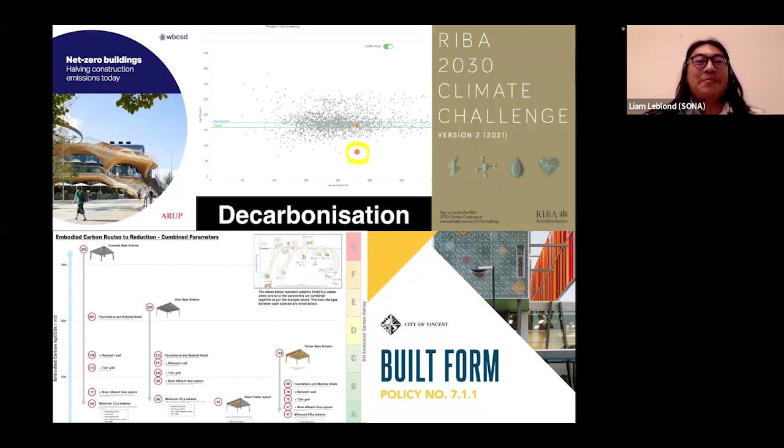Thanks, Liam, and thanks for joining everyone. It's always a wonderful thing to be hanging out with young folks.

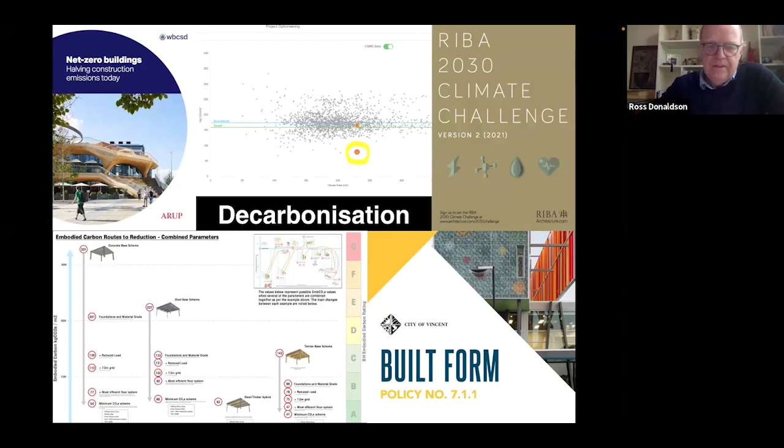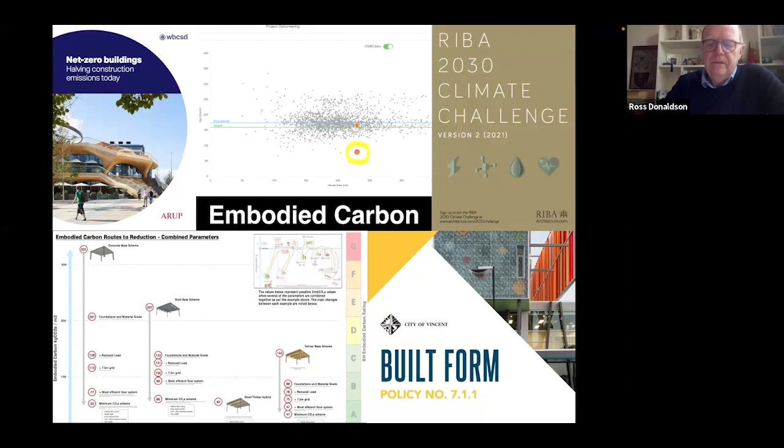So I'm talking about decarbonisation today, not surprisingly, with a specific focus on embodied carbon. The central theme around embodied carbon is really about dematerialisation, kind of less stuff. There's huge gains to be had by rationalisation, whether it's structure or other aspects of a project, to make massive gains in embodied carbon. And it's probably a bit easier than everybody thinks, certainly easier than the general discourse seems to be about it.

I'm going to do that by talking about 5 separate sources of inspiration or information. There's work that the Royal Institute of British Architects have done with their climate challenge document produced in 2021. There's a very interesting case study of the City of Vincent here in Western Australia, and their work around requiring life cycle assessment. Then I'm going to go on to Carbon Trace, and these two are basically focusing on the residential sector. Carbon Trace is an amazing platform that Tom Petty in Victoria has put together, and I'll elaborate on that when I get there.

And finishing up with two of the world's leading engineering firms, Arup and Buro Happold, focusing primarily on the carbon in structure. And in the background context, of course, it's impossible to know what everybody knows. You don't know what you don't know in this context.

Just as a brief scene setting, the general move in terms of measuring carbon in buildings is based on a European standard, EN 15978. This diagram is a very simple representation of the different phases in the life cycle of a building, and these are the phases that are used for measuring carbon.

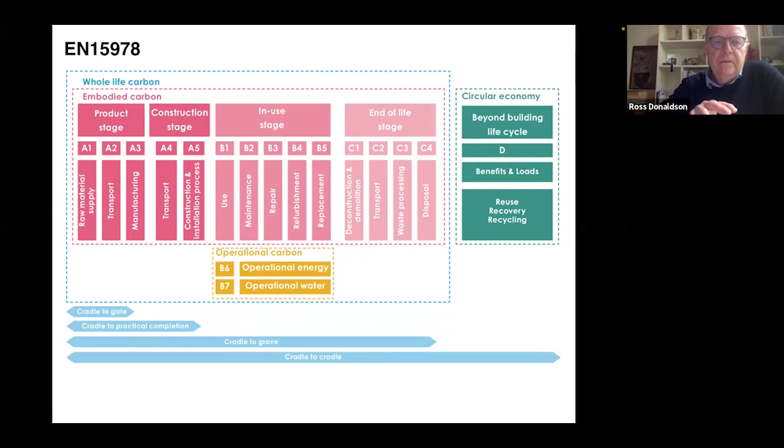Then there's the in-use stage of the project, which I won't talk much about, but some of the measurements do include this, and the end-of-life stage, which is recycling, hopefully, and demolition, but hopefully not disposal to waste. There's a circular economy element to it, and whilst the RIBA refer to the circular economy, I really won't be today. So just today focusing on embodied carbon, upfront carbon during the product stage and construction stages A1 to A5.

So the first document is the RIBA's climate challenge from 2021, and it's an interesting document to look at in terms of the scene setting that they include in a couple of diagrams, tables from their document, which talks about operational energy at the top and business as usual, which is what they were saying was the British sort of average project, business as usual projects, this is the commercial sector.

They were setting targets for 2025, reducing the energy consumption in the building, and by 2030, more than halving the energy consumption in the building. That's based on using kilowatt hours instead of CO2 here, because of the rapid rate of the greening of the British grid, and not wanting to get caught up in the fact that the electricity supply will be fairly green fairly quickly.

They want to keep the focus on reducing the energy consumed, and embodied carbon, 1,400 kilos. Don't worry about the numbers too much, but it just shows the British have fairly advanced thinking in terms of driving carbon down. They have a table for other classifications of buildings, including new schools and residential. There's some correlation between these numbers and others I'll be showing, but I don't want today to be too focused on specific numbers. It's all about how you drive the carbon down and the percentage gains you can make.

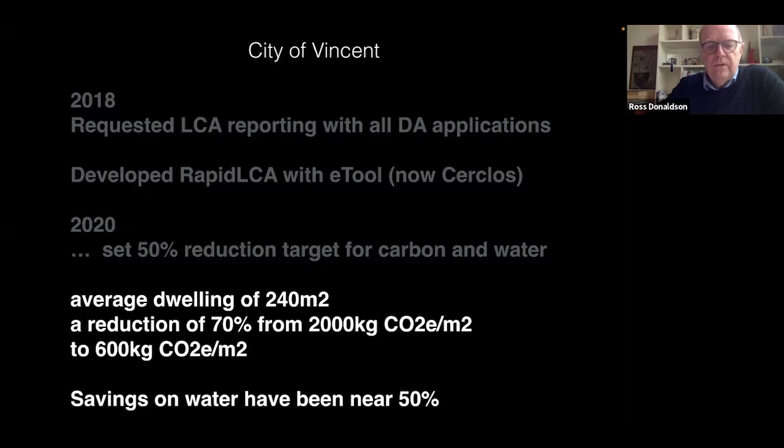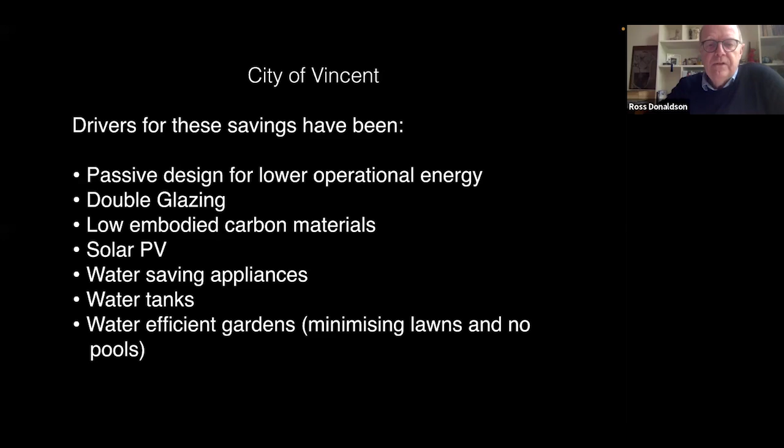The fascinating thing is that by requiring people to measure and report, it straight away changed the culture of design. Designers were then focusing on trying to reduce the carbon, and the outcome of this simple shift is that now they are achieving something like a 70% reduction in whole of life carbon. From 2,000 kilograms per square meter for a residential building, they're now down to 600 kilograms per square. It's amazing progress just from requiring reporting, and they've had major gains in water consumption too. These outcomes have been achieved through passive design, lowering operational energy, double glazing, low embodied carbon materials, incorporating photovoltaics, water saving appliances, water tanks to capture water, water efficient gardens, and no swimming pools. Some quite simple steps that are really in everybody's remit.

Alongside that, there's a fantastic piece of work done by Tom Petty, his platform called Carbon Trace. He's taken the NatHERS database that CSIRO carries for all residential developments in the last 10 years - a database of 10 million. He knows the embodied carbon of every house in Australia built in the last 10 years. It's quite remarkable. This diagram isn't great, but it illustrates a scattergun effect of where the average across the whole country is. This is just A1 to A3, not during the construction phase itself.

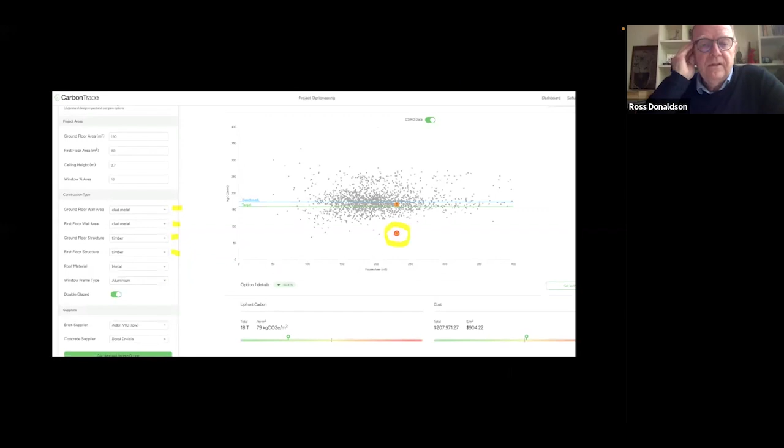He's shown that you can get the embodied carbon down from 175 to 79 kilograms per square meter - that's just on the upfront A1 to A3. It's a much lower number than Vincent are talking about, because that was whole of life carbon, but it's a 55% reduction simply by getting rid of concrete slabs and heavyweight construction, using lightweight construction, metal cladding, and double glazing. Just those simple design changes can dramatically reduce the embodied carbon in a building by over 55%.

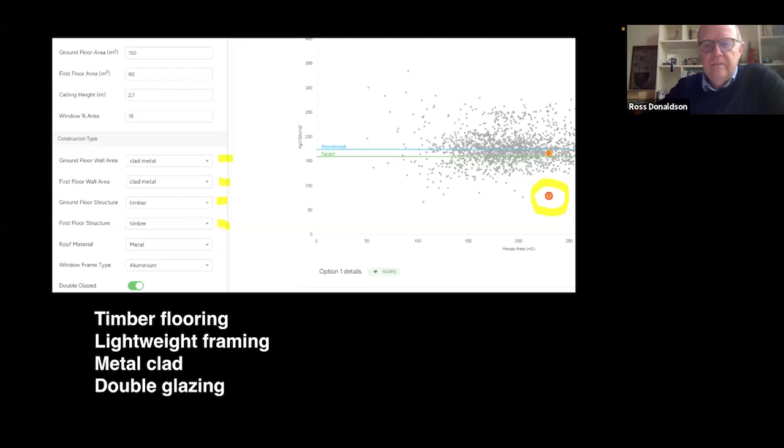To give you an example from his database, the average embodied carbon for A1 to A3 in WA is 234, mainly because of the common use of double brick and concrete slabs here. Victoria's 168, New South Wales 173, and Queensland 100. I'm not sure why South Australia isn't there, but you can see everywhere other than WA is in a similar territory because of the construction systems used.

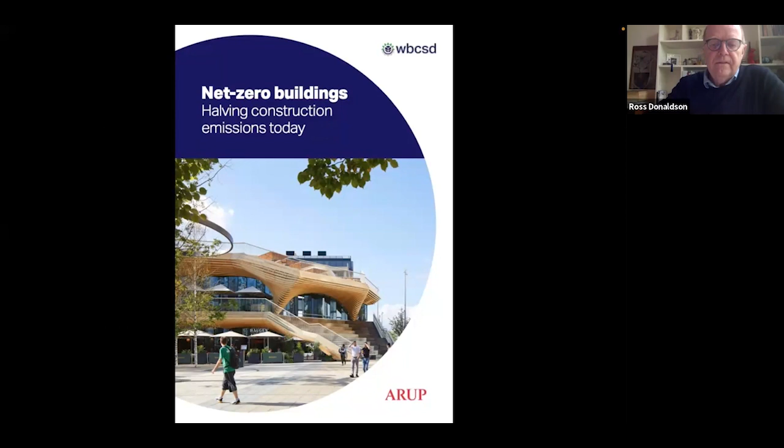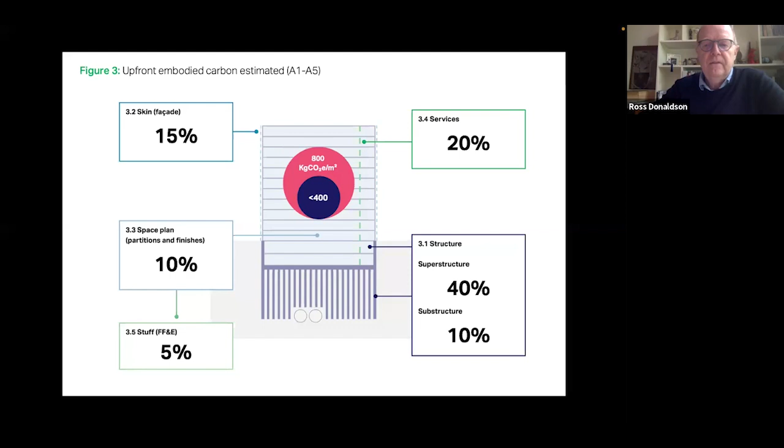Now getting on to the engineers and moving up to a different scale. This is a document produced by Arup in 2020 with the World Business Council, focusing on structure. This is a modest scale commercial building, and it shows where the embodied carbon is: in the skin it's about 15% on the left-hand side, space planning and partitions about 10%, other FF&E type stuff 5%, services 20% of the embodied carbon, but 50% of the embodied carbon is in structure. So the real target is in structure.

I might skip over this one, it's probably too much information to absorb in a short amount of time. But I'd commend you to look at this document by Arup, because it shows you a whole range of different strategies you can use for reducing the embodied carbon in your building.

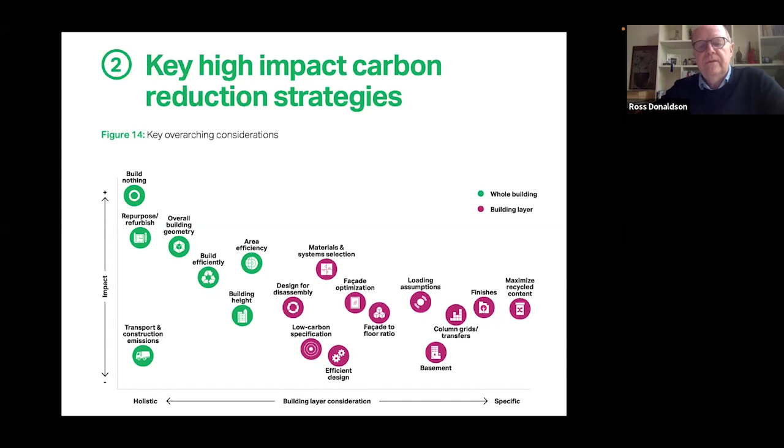There's great gains to be had by refurbishment. If that's not possible, there's all sorts of other strategies around facade and structure and so forth. And they include the embodied carbon for different floor structures.

Just to give you a taste of what the document's like, you can see their standard flat plate chews up a lot of carbon, and the lowest one is a ribbed slab, which is less than half, about a third of the flat plate in terms of embodied carbon.

Flat plates are popular because they're cheap for formwork and rapid to build, and ribbed slabs are more expensive. But then there's a trade-off between the amount of concrete you're using in the structure versus the simplicity of the structural system.

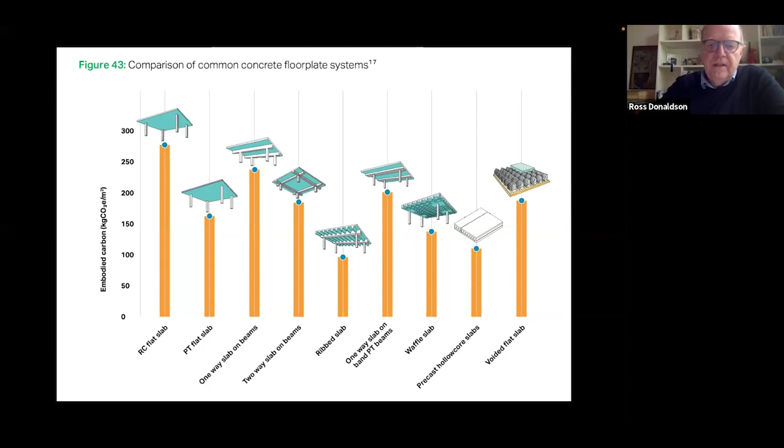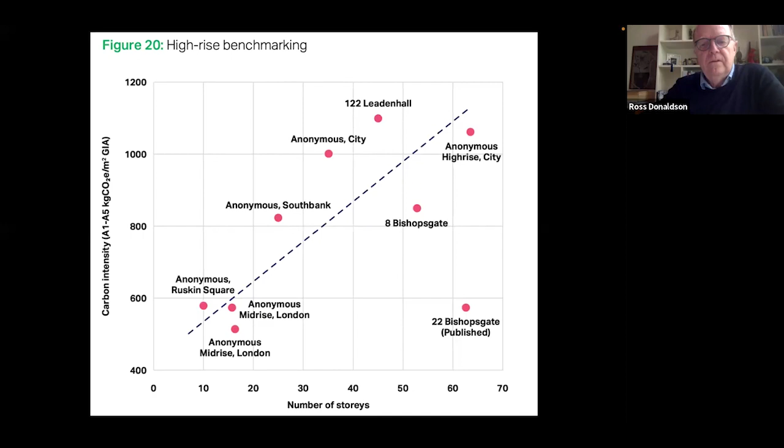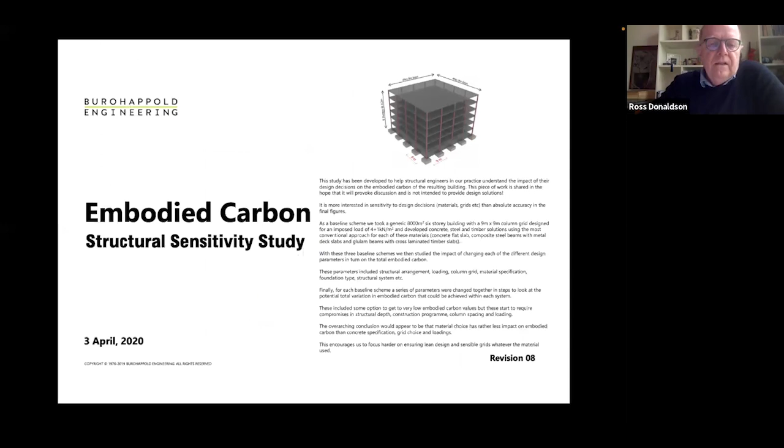And then finally, the BuroHappold piece, which develops this in a bit more detail. They've got a fantastic document, very simple, a ready reckoner guide to embodied carbon in structure that they put out. I'm just going to touch on a couple of aspects of this as I wrap up.

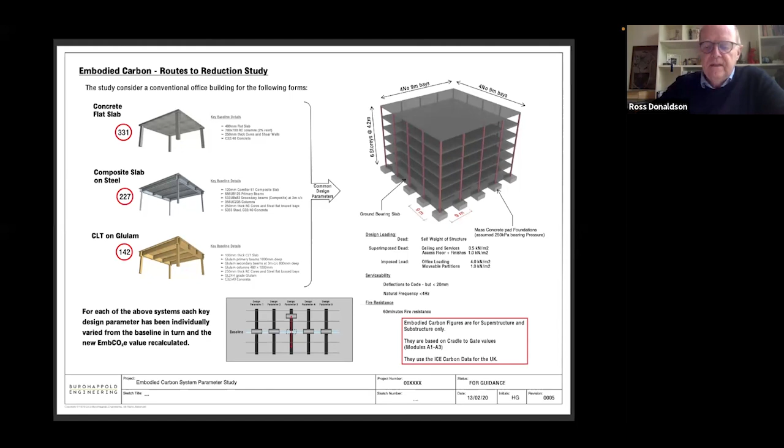They've taken a simple building, about 36 meters by 36 meters, 6 to 7 stories, a bog standard commercial office building typology, as a reference building. They've measured the embodied carbon for a concrete slab structure, a steel structure, and a timber structure.

I want to show you the impact of how design decisions affect the structure. A standard flat plate structure with columns on a grid of about 9 meters will give you about 331 kilograms of CO2 equivalent per square meter, and that's just A1 to A3.

I keep noting this because the numbers are sort of up and down all over the place, but the key thing is the percentage of reductions you can achieve. If you can use cement replacement, and there's a limited amount of cement replacement products still available, you can get from 331 down to 175. And if you shift the column grid from 9 down to 6.5 meters, you can get it down to 200.

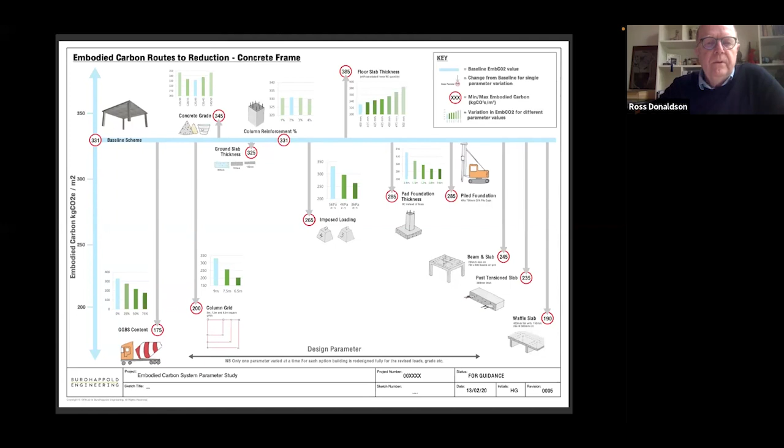So you can nearly halve the total quantity of embodied carbon in these structures through cement replacement or the structural grid.

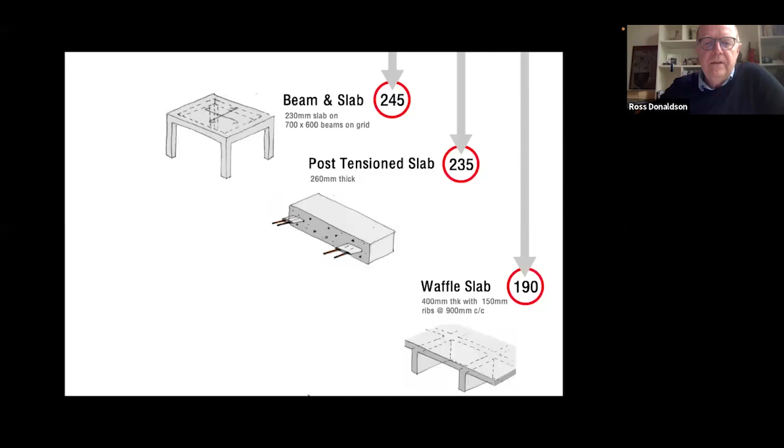Or you can look at different floor slab structures, and you can see the movement from the 331 number down to 245, 235, and 190 with different structural systems. I certainly don't expect you to absorb all that as I'm talking now, but this information is available.

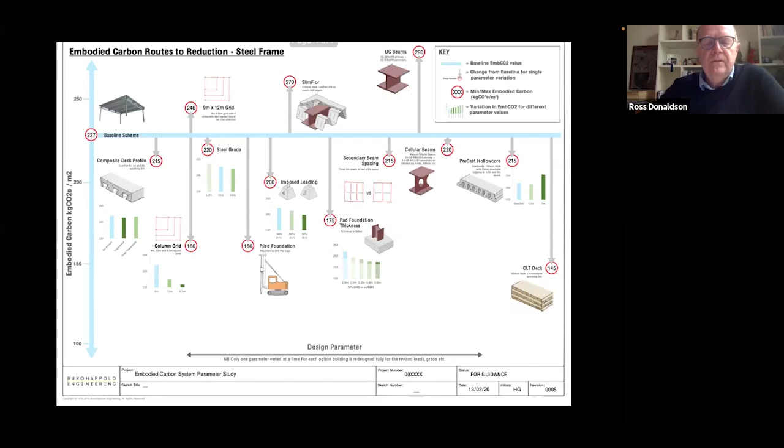They've done it again for steel. I won't try to take you through all that, but you can see all sorts of different design decisions around grids, loadings, footings, and floor slab systems, and the same for timber.

Interestingly, they compare the three structural systems of reinforced concrete, steel, and timber. If you take every strategy you can with a reinforced concrete slab, you can go from 331 down to 54. You can take nearly 80% of the embodied carbon out of a concrete structure while still being a concrete structure, just by rationalizing the structural system.

Steel you can get from 227 down to 66, and timber you can get from 142 down to 41. So it's in the hands of the designers, with their structural engineers, to be making these decisions.

We don't have to rely on new materials, although you can include some blast furnace slag or some other kind of cement replacement to help. You don't have to have new structural construction systems. We're using existing supply chains, availability, and the kind of systems that everybody on site's already used to.

So major changes, major improvements to embodied carbon can be achieved just through design decision making. We're the designers, we have control over that. There's no reason why we should be abrogating that responsibility.

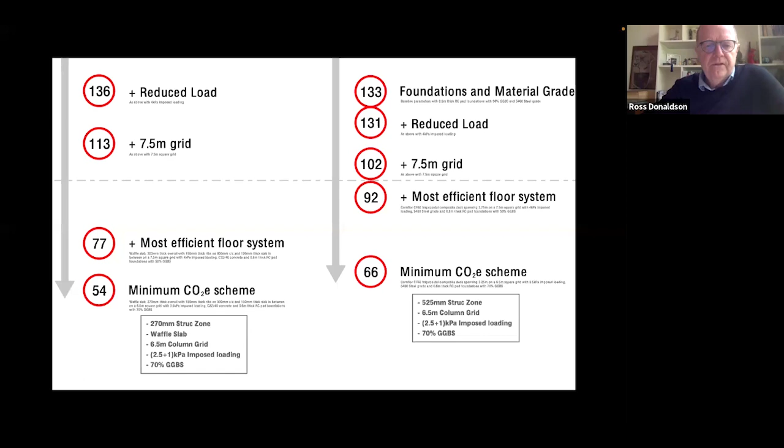Here you can see on the left-hand side the different steps in the structural system. The thing I think's amazing about this, in terms of what's in our power to take command of with these sorts of decisions, is that it's not in itself a basis for choosing between concrete, steel, or timber. They all end up around the same if you rationalize the building and optimize the system, so you're not wasting material and pushing structure beyond what it needs to do the functional job.

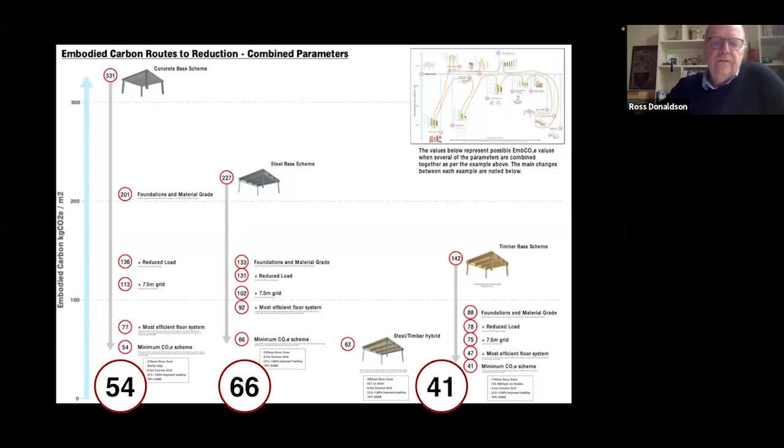And finally, NABERS is in the process of building a new platform for us to report embodied carbon. They've been reporting operational carbon for years now, of course, and pretty soon there'll be a product on the market that'll be a national standard for how we measure carbon.

So there we are. Dematerialisation is the key to decarbonisation. Thanks very much.

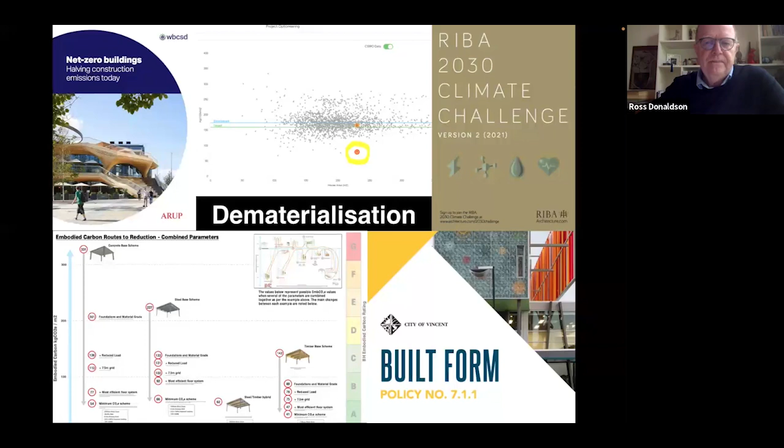I'll start off the Q&A with a question of my own: since beginning your career in architecture, what sorts of shifts have you seen in the sustainability space?

Well, interestingly, I've been around a while - I graduated back in the 70s, and there was a lot of interest in those days in the basic notions of passive design, sensible design around climate. It got lost, I think partly due to politics and lobbying sometime during the 90s. In the 80s there were lots of advocates for the risks of climate change, and it's come back - but only relatively recently has it come back with real science, to understand the implications of climate change and the ability to calculate the carbon effects of our design activity.

Yeah, absolutely. I guess speaking of calculating and getting some really strong numbers, something more objective like you're saying - how and where can students, grads, and by proxy fellow practitioners, I see a lot of them in the chat today, find resources to begin integrating sustainability-focused principles into their everyday workflow?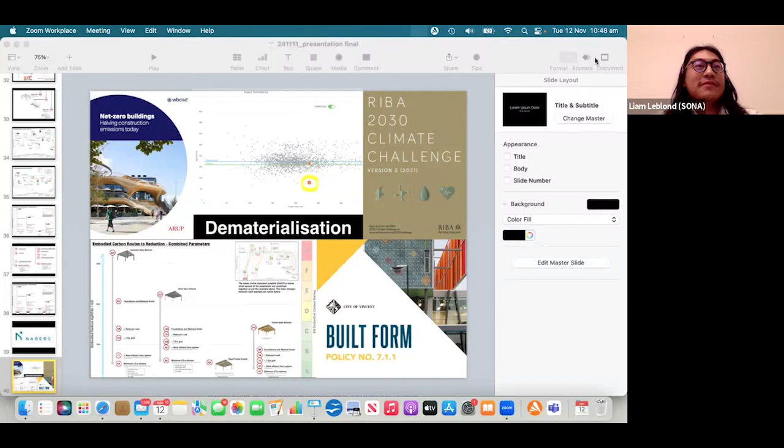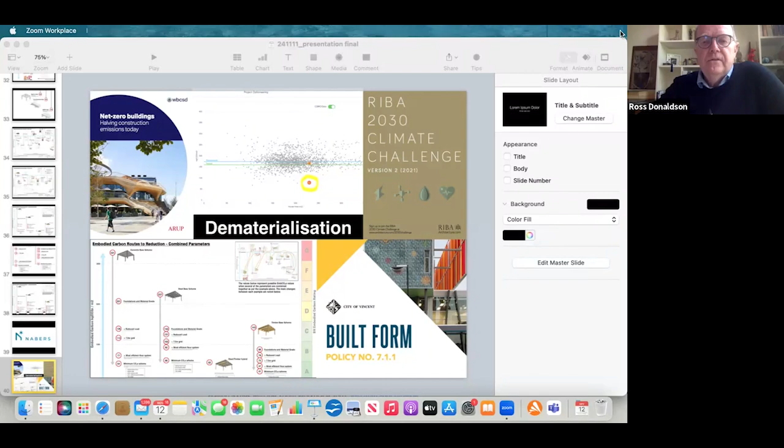There are lots of different life cycle assessment tools around the world - one is eTool, developed in Australia, used around the world as well. I think the main window to understanding the implications of your design decisions - that's why I put them in this presentation - there is material around that can give you a sense of what design decision making will impact.

Using less concrete in a house, unless you can get carbon replacement materials for the cement. Lightweight construction rather than everything being brick - though that's really a major problem in Western Australia, not so much the rest of the country. Not designing a building so that it puts more stress on the structure, overstressing it and therefore using a lot of carbon in doing so.

So it's not a simple answer to that question, Liam, but there are good materials MECLA have produced - their spotlight talks. There's quite a few materials the Institute of Architects have, which should be accessible to members. So it is a bit all over the place still, I have to say. Absolutely, making a start - getting started is the key thing.